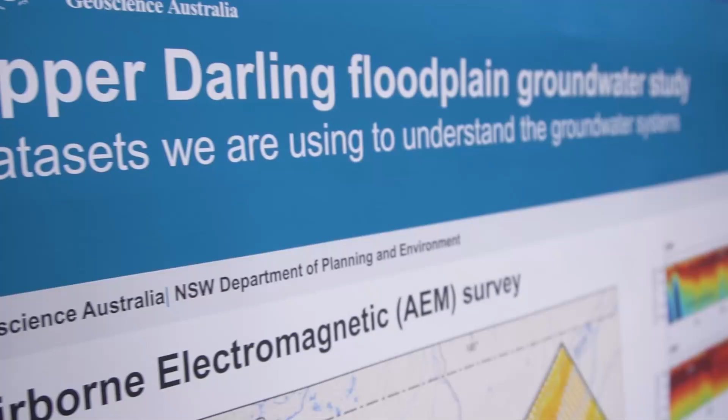We'll work closely with our stakeholders to help them realise the benefits of pre-competitive geoscience data and information and continue to build strong, lasting relationships with First Nations peoples to create further collaborative opportunities.

By partnering with Commonwealth, state and territory governments, our research partners and communities, this landmark initiative will ensure a sustainable, thriving and resilient Australia for future generations.

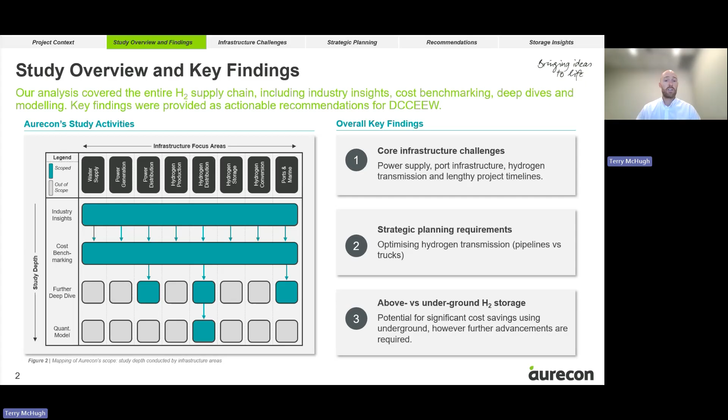The 3 key findings from the work are shown on the right. The first is around some of the major challenges facing industry at the moment, specifically relating to cost-effective power supply, port infrastructure, hydrogen transmission, and lengthy project timelines. We also suggest that strategic planning is required to ensure that the most cost-effective method of hydrogen transmission can be achieved. And then when comparing underground and above ground storage, there are significant cost savings that may be able to be realised through the use of underground hydrogen storage. However, there are some hurdles to overcome.

All right, so getting into some of the infrastructure challenges. The most prominent one and up first is power supply. Securing sufficient cost-competitive renewable energy remains a primary barrier to wide-scale hydrogen adoption. Renewable hydrogen is an extremely energy-intensive process, with power making up about 60% of the total cost of production. Efforts to reduce the cost of supplied power are the most effective option for increasing the viability of projects in Australia.

On the second point, Australian ports will require targeted upgrades and new infrastructure to support hydrogen exports, including storage, processing, and loading facilities. While some ports already handle commodities like ammonia, additional capability will be needed at scale. Some of the challenges include constrained land availability, especially considering the footprint required for portside production. Furthermore, owing to the hazardous nature of hydrogen and derivatives, there is a need for very large separation distances between those sites and neighbours, limiting the number of suitable locations. Separately, ports will need upgrades to accommodate the import of large renewable energy components, such as wind turbines.

On hydrogen transport, whilst pipelines typically offer the lowest cost transmission method for large-scale hydrogen transport, there are currently no operational large-scale hydrogen pipelines in Australia, and the regulatory landscape is still evolving. This study also investigated repurposing of existing natural gas pipelines, and whilst this can potentially reduce approvals timelines and costs, there are technical challenges to overcome, such as material compatibility issues and reduced operating pressures.

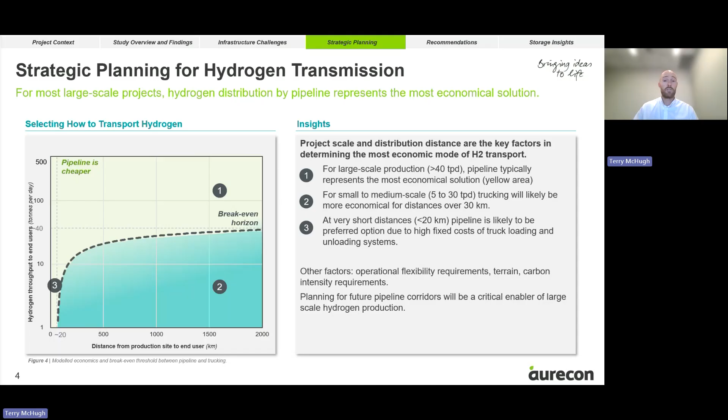Okay, so now onto some of the recommended actions. First is on government-led investment in common user infrastructure, such as low-cost renewables, transmission development, port readiness, and water supply infrastructure, which could improve commercial viability of projects and improve investor confidence. We've also highlighted the need for a coordinated approach between federal, state, and territory governments as critical for developing a clear, robust pathway to hydrogen scale-up.

On the second point, whilst policy was not the focus of this study, this work has highlighted that many hydrogen supply chain technologies, such as hydrogen pipelines, tube trailers for transport, and hydrogen storage solutions, which have been successfully deployed globally elsewhere, are yet to be commercially deployed in Australia. The proactive development of policy, safety guidelines, and permitting standards is essential to avoid project delays and provide confidence that infrastructure will be supported by fit-for-purpose regulation.

And thirdly, the preservation of key transmission and pipeline corridors into prospective hydrogen hub and strategic port locations, for example, Gladstone in Queensland, the Hunter region in New South Wales, Port Bonython in South Australia, Kwinana in WA, or Bell Bay in Tasmania, will protect long-term infrastructure opportunities and reduce future development costs.

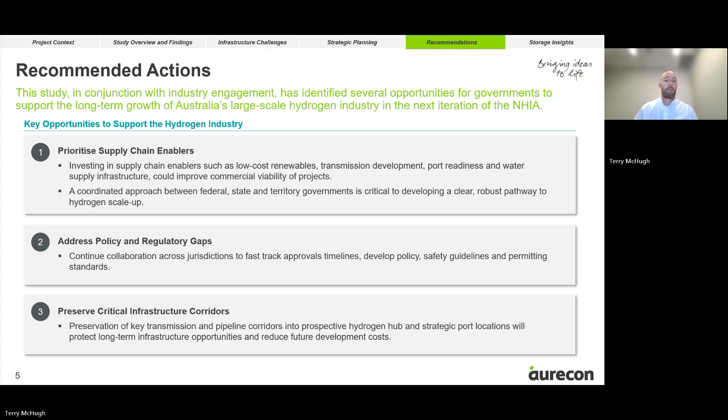Other options for above-ground storage include spherical tanks for storing very high pressure or liquid hydrogen, smaller composite cylinders, or metal hydride storage. Bullets are typically operated at pressures of around 60 to 100 bar, and each vessel is capable of storing about 1.5 to 2 tonnes. In terms of size, these things are massive, about 24 metres tall and 3 metres in diameter, although they can be scaled up and down.

The size and weight of these presents logistical challenges for transporting these vessels to site, and may necessitate on-site fabrication in some instances. In terms of cost, our experience shows that these typically cost around $3.5 million per tonne of stored hydrogen for large-scale projects.

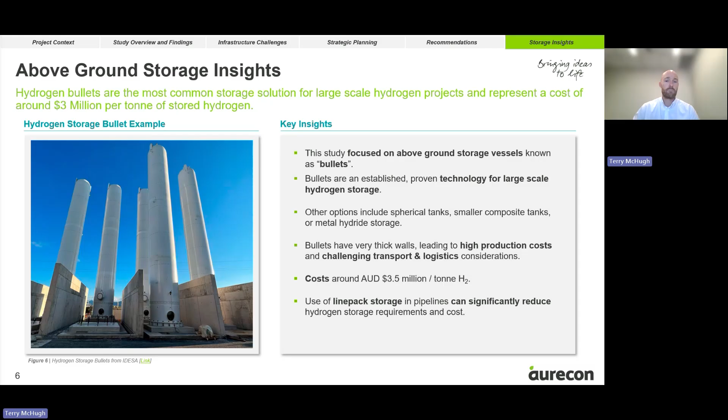Whilst there are only a handful of operating examples globally, studies suggest that the cost of underground hydrogen storage may be as low as an entire order of magnitude cheaper. That is 1/10 the cost compared to above-ground storage solutions. Hence, there is a lot of discussion and focus on this as an opportunity to help bring down the cost of hydrogen.

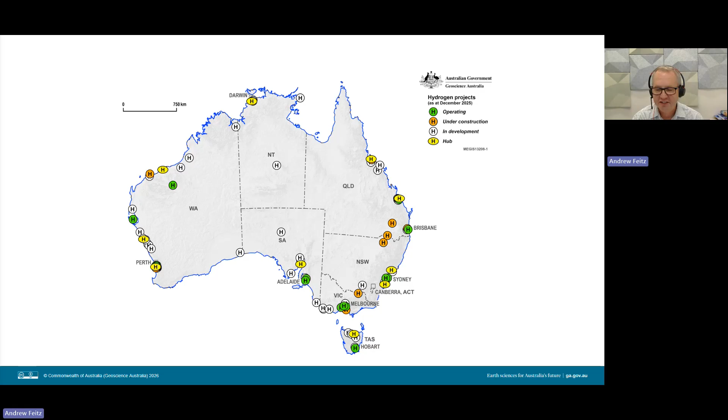All of these projects, if they are successful, will need hydrogen storage of one kind or another. For some projects, that might be tens of kilograms or maybe a couple of tons, and that'll be in above ground high pressure tanks or short pipelines. For other projects, they may require thousands of tons of hydrogen storage to ensure a steady supply of hydrogen to a low emission industrial hub or for plants making products like green iron or ammonia. Having literally thousands of above ground tanks, as you saw from Terry's slide, is simply not practical for a project or cost effective. And this is where underground hydrogen storage becomes important.

Geoscience Australia has committed to produce a national hydrogen hub storage assessment in 2027. It will assess the most feasible underground storage options for each of the planned hydrogen hubs, including depleted fields, salt caverns, and lined rock caverns. Depleted fields occur when natural gas has been extracted from rocks underground. Sometimes the gas is re-injected into these fields to create a seasonal gas storage buffer, like we see at Lochard Energy's Iona plant in Victoria.

Another option is to store hydrogen in salt caverns. The salt required for a cavern is the same rock salt you use in your salt grinder at home, sodium chloride or halite. This type of storage is used for storing commercial quantities of hydrogen around the world today, with many more planned and under construction. These caverns are typically located 500 to 1500 meters underground.

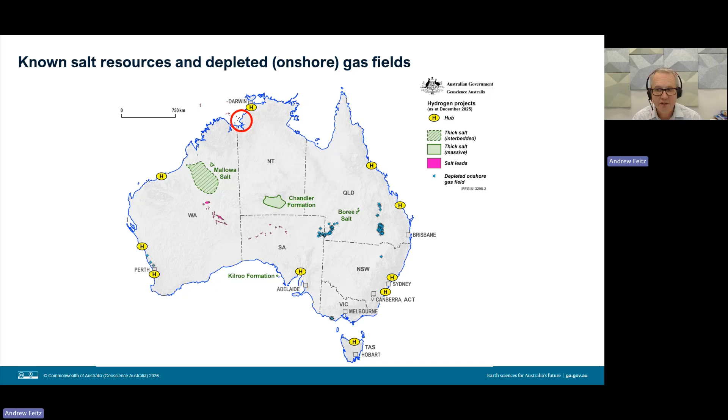An area of interest to us, though, is up near Darwin. You can just make out some tiny small spots up there off the coast, where I've highlighted it in that red circle. These are reported salt diapirs, and there is a chance that these could be located closer to the shore, maybe even onshore. So this is a really exciting area for us to have a look at. That area connects well with existing pipeline easements as well. So this is pretty interesting.

Now, I haven't shown the location of prospective sites for the mined rock caverns on this map. And the reason for that is that they can all be potentially located within approximately 50 kilometers of each of the hubs. So basically where all the current yellow hub markers are at this national scale. And this is the big advantage of mined rock caverns. And we'll explore this a little bit more over the next couple of slides.

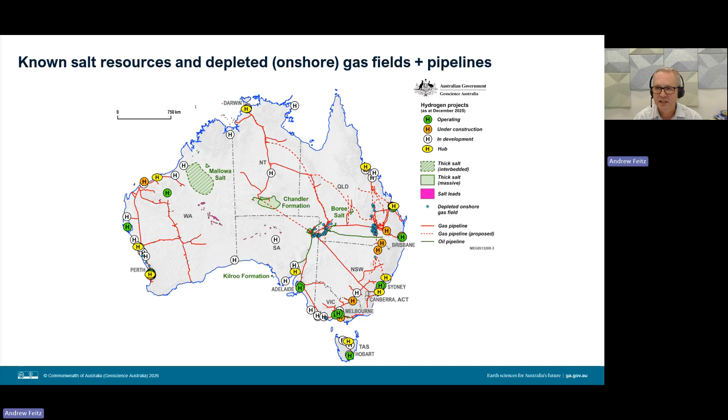Geoscience Australia has recently published work on hard rock caverns and lined rock caverns and the application to Australia. We commissioned 2 studies. There's a study by Geostock, which we'll hear a little bit more about in the next talk, to conduct a study on whether hydrogen could be stored in lined rock caverns and look at some particular sites around Australia. A second study was commissioned to Lane Power and Energy Solution in the US on unlined rock caverns and whether they could be suitable for hydrogen storage. So these 2 reports are available online if you want to have a look at them.

They outline the economics of hydrogen storage. They talk about that building underground caverns has high upfront costs, much like above ground storage tanks in terms of high, but certainly not as high as $3 million per tonne. But the running costs are lower because the caverns are naturally protected underground. And the reports discuss key operational considerations like how much rock, how the rock must behave to safely contain gas, risks such as hydrogen embrittlement or too much pressure, along with ways to manage them. So let's have a look at some of these findings.

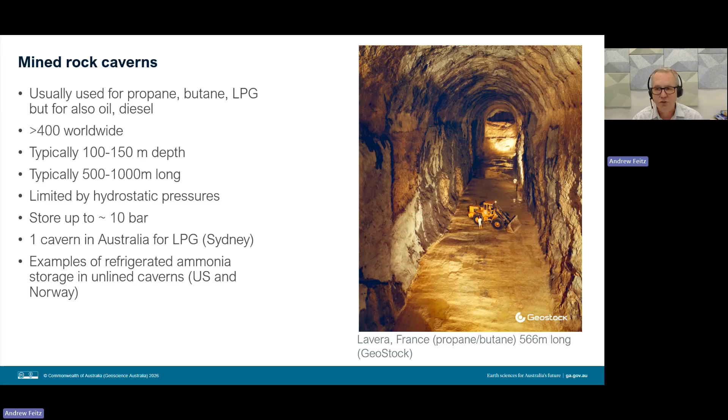Another interesting fact is I wasn't aware of this until fairly recently, but mined rock caverns have also been used for refrigerated ammonia storage. So refrigerated ammonia is at minus 33 degrees. There's examples of these in Norway and in the US. So what essentially happens, you pour the liquid ammonia into a cavern, and it essentially freezes the rock and the water within the rock. So you create like a big ice ball within the rock, and there's a cavity inside which you can use to pull out the refrigerated ammonia. And it turns out that this could be actually a cost-effective way to store ammonia underground in comparison to above ground tanks.

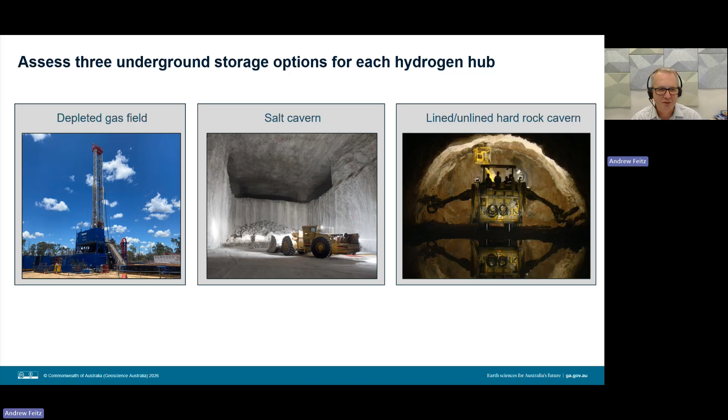Okay, but as we get to the conclusion of this talk, what about the cost? And this is what it's all about. Well, here are some capital costs of different options published in recent reports. 300 million for a salt cavern is definitely on the upper end, I would say. I've seen estimates closer to 100 million. Mined rock caverns have much higher capital costs compared to a salt cavern, however, and we're talking in the order of about $900 million for 1,000 tonnes. We suspect that the capital costs for depleted field storage are cheaper than for salt storage based on what we know about drilling costs, but we don't have published numbers in Australia yet.

However, based on the numbers that you see on the slide, you would think, well, let's go with a depleted gas field. It seems to be the cheapest option, right? Well, it's not that simple, because what we really want to know is how much hydrogen could be delivered each year. So think of the petrol tank in your car. Well, actually, maybe not, unless you want to cry, but filling it up once a year is not going to get you very far. It's the number of refills each year which is important.

And when we include the number of refills into the equation, you can see that a depleted gas field can do 1 or 2 cycles per year, a salt cavern roughly 8 cycles per year, and a lined rock cavern potentially weekly.

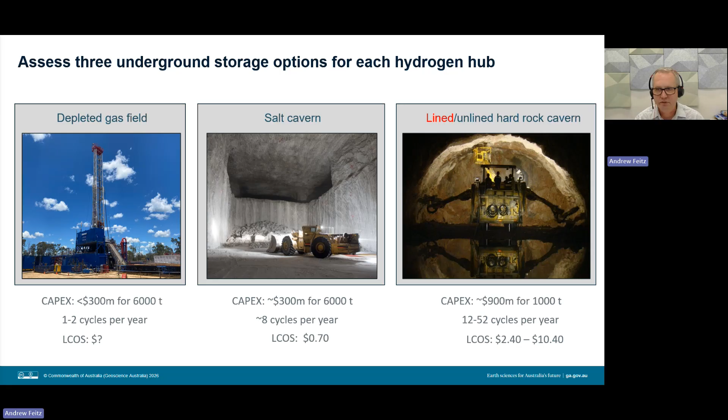The beauty of salt caverns is that with the vertically solution mined ones, they're just separated by a few hundred meters, which means you can have multiple caverns in the one area, and this helps to reduce the costs further. And this is why GA is focusing on finding new salt accumulations. Over the next few years, we plan to fly airborne surveys over different parts of the country, using geophysical techniques like gravity gradiometry to look for signatures of salt deep under the earth.

Once we sort out where the potentially suitable depleted fields are located, remembering that not all depleted fields will be suitable, let's filter down to those that could be and map out the salt as best we can. Then we can start to join the dots and work out what's the best underground storage option for each of the hubs, balancing long pipelines with potentially cheaper storage options further away versus shorter pipelines but more expensive storage. So the solution is going to be different for each of the hubs. So stay tuned for next year when we release our report.

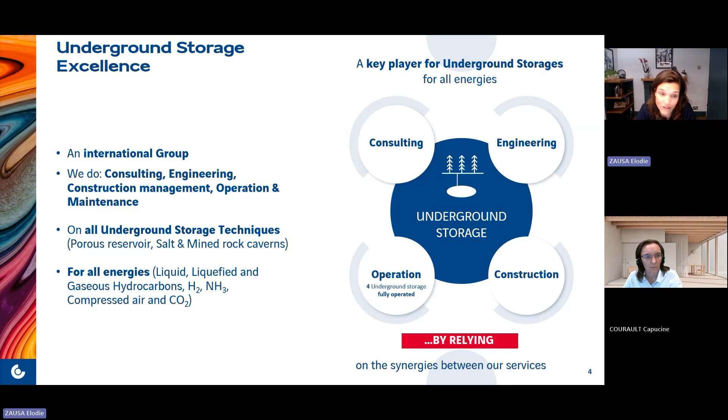We cover actually all the phases to develop underground storage, from the geological screening to the commissioning and the operation and maintenance of the cavern. So it means all the phases: the development of the pre-feasibility, feasibility studies, supervision of the construction, and then commissioning and operation of the caverns. And this for all types of energy. We will focus on hydrogen, but we were created 60 years ago for the development of French strategic stock in France for oil and gas.

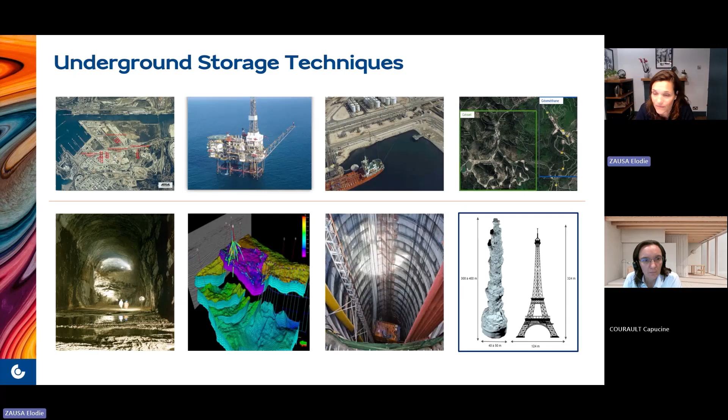So here you have a few pictures of underground storages. Starting with the one on the left, it is a mine cavern in France to store LPG. In the middle is porous media to store natural gas in Spain. Then you have a mine cavern again to store crude oil in Singapore. And on the right-hand side is salt cavern. They store crude oil, refined product, natural gas, and there's one of the biggest projects in France for storing hydrogen, 6,000 tons of hydrogen.

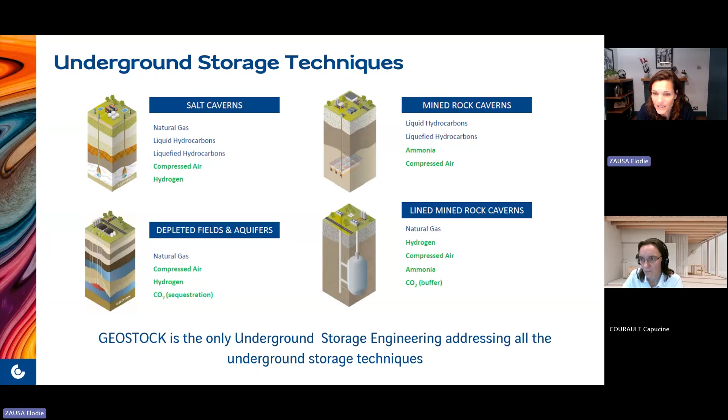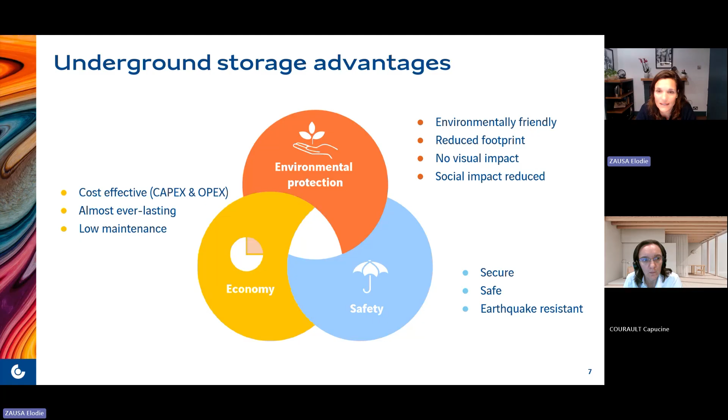And here is the list of all the advantages of underground storage from an economical point of view, safety, we see that quite a lot, unfortunately, right now in the Middle East, and environmental protection as well. Just to give you a quick look, we speak a lot about hydrogen, and we also see that in our activities since 2020. We have done quite a lot of studies worldwide regarding development of hydrogen projects, mainly in Europe, as you can see, and we distinguish the three techniques. In orange, you have the porous media studies, blue for the salt cavern, and pink for the lined mined rock cavern. We have quite well advanced projects in Europe regarding lined mined rock cavern in the UK and Ireland.

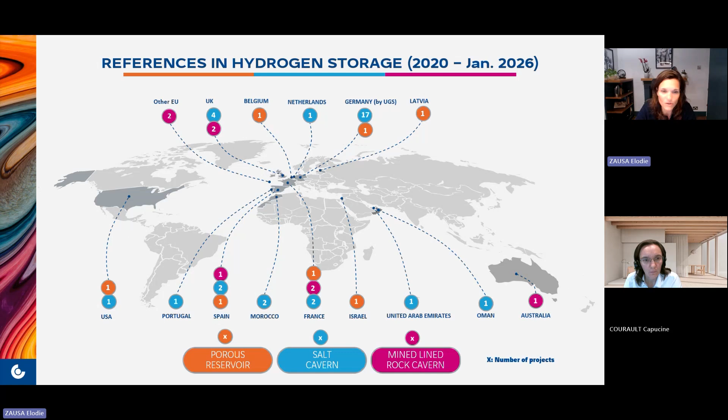So here you have a summary of the advantages, pros and cons, about all those techniques. So clearly the salt cavern is the most proven one. There are already existing caverns in the US and in the UK. Of course, as Andrew said, that technology requires a specific geology that is not available everywhere. We'll see that later. And also, we need quite a lot of water for the process of creating the cavern, the leaching process. And if you are inland, not close to a source of water, this could be a difficulty as well.

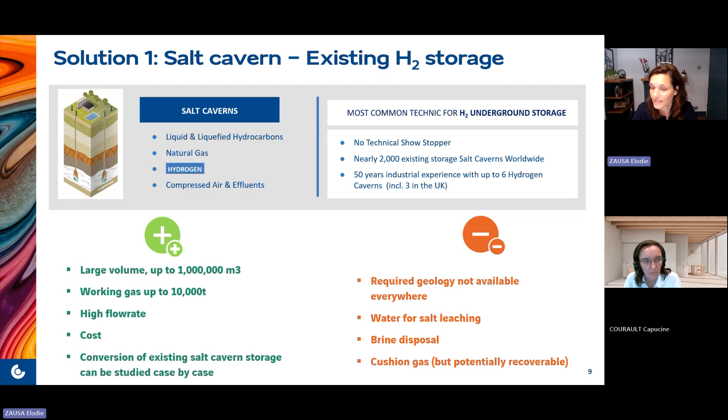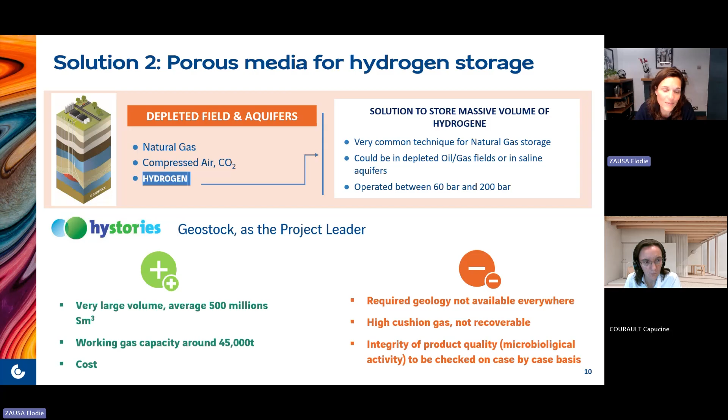If we move on to porous media, there's a very good study that has been done with Geostock as a leader during 2 years, regrouping academics and industries. It's HyStories. You can find all the details online, and that study covers quite a lot of the questions you may have from a technical and economical point of view. This technique, we clearly see it for very large volumes of hydrogen, and it is not as reactive on a day-to-day basis. We recommend going for the salt cavern instead.

And the last one, and then I'll give you the floor, Capucine, is about the lined mined rock cavern. As we said, salt is not everywhere, so definitely you go for salt cavern if you have salt. But if not, we recommend the lined mined rock cavern if we think about storing massive quantities of hydrogen, and we developed that technology just because salt is not everywhere.

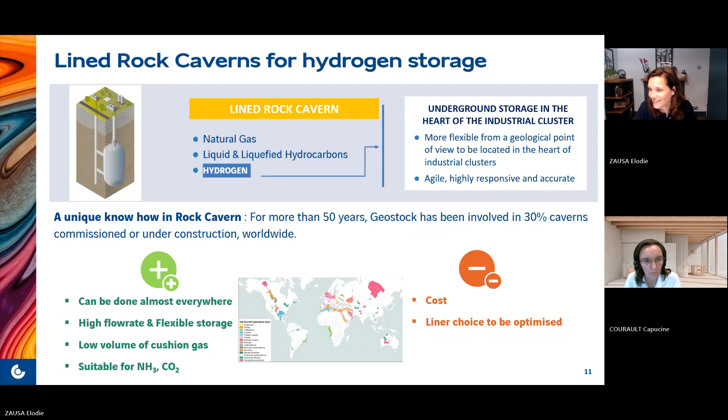And now I'm going to dive into the lined rock caverns. A lot of the slides presented here are part of the studies that Geostock performed for Geoscience Australia, so you can find them in these studies that are publicly available.

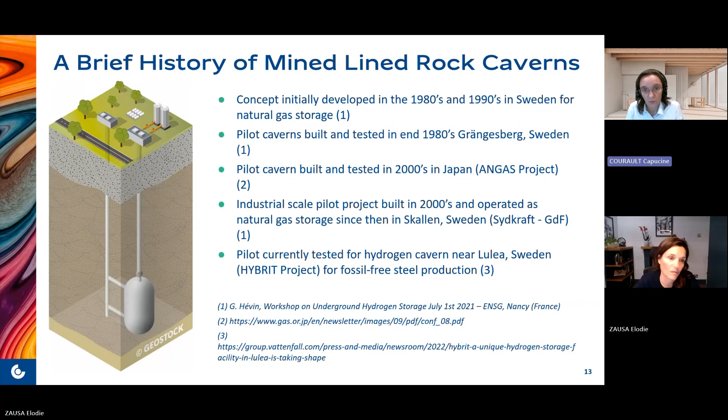A brief history. For lined rock caverns, the concept started to be looked at in the 1980s for natural gas, and then more recently for hydrogen in Sweden. You can see that most of these pilot projects were in Sweden and in Japan, and the reason is that the geology of these two countries, the rock underground, is mostly hard rock. So for these countries, that's the only option. So if you go to the next slide.

So why lined rock caverns? This has already been introduced by Andrew and by Elodie. It's really the concept that with an unlined mined cavern, if you're looking at hydrogen, you are limited to less than 10 bar. And if you use a liner, you can go up to 250 bar. Basically the constraint of being less than 10 bar is that the quantity of hydrogen stored will be very small, so most likely uneconomical.

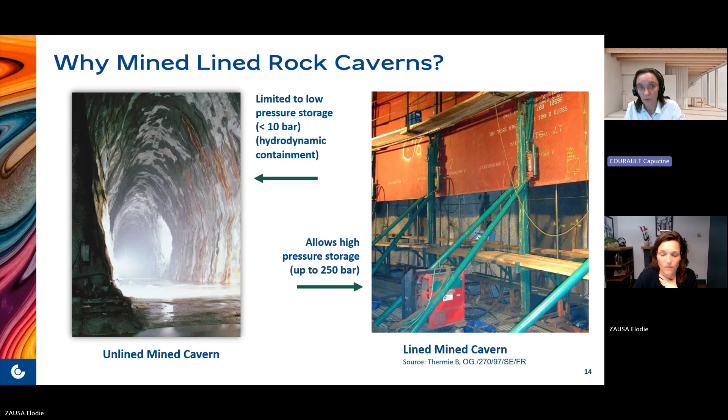However, as Elodie presented in a slide before, you can consider ammonia storage in an unlined mined cavern. And if you go to the next one,

so this is a high-level design workflow for such caverns. You look at the operating needs, injection and withdrawal flow rate. You look at the rock mass parameters, the capacity needs, and then with a lot of rock mechanics analysis, you establish the diameter of your cavern.

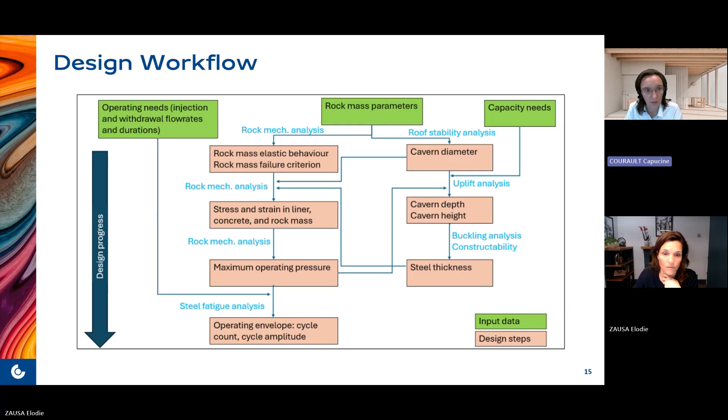These caverns have more of a vertical shape, curved at the top and at the bottom, and they're often called silos because they look like silos. So you estimate diameter, depth, height, the thickness of your steel, a lot of parameters that will allow you to build your cavern. And if you go to the next slide,

this is an example of some parameters that are looked at. For example, if you assume a certain cavern capacity, a minimum pressure, a maximum pressure, you calculate a geometric volume for your cavern, and then you have a concept which is the concept of uplift.

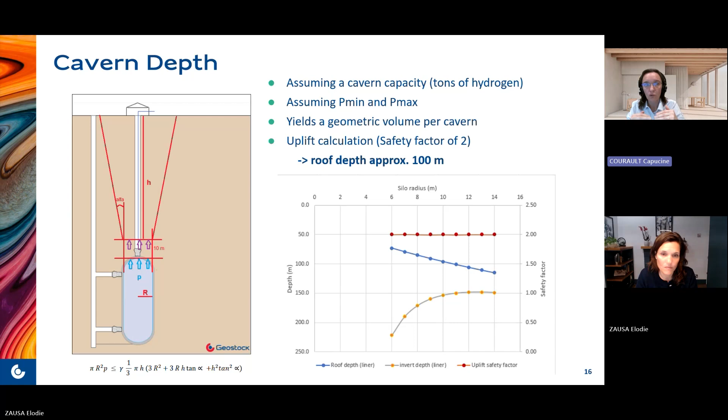When you're at maximum pressure, the pressure from your hydrogen would push the liner, and would break the liner if you don't have enough weight from the rock above. So you look at a certain cone of influence of the rock above the cavern, and you calculate the minimum depth that you need to place your cavern at to still meet a safety factor of 2.

And if you go to the next slide, this is some aspect of construction, just focusing on the slide on the left. We speak about a lined rock cavern, but as you can see, there is a steel liner, but it's not just a steel liner and then the rock next to it. You have, from item 2, the sliding layer, to item 6, the drain pipe.

You have all these elements, and they're really like a buffer, almost like a sponge, maybe like a mat when you do gymnastics, something that would help break the pressures when you're at maximum pressure from the cavern, or when you're at minimum pressure from the cavern, you get the pressure from the rock mass and from the water underground.

So the steel liner, but also layers 2 to 6, have to be designed properly to really accommodate this swing of pressure, so that the steel liner doesn't break during the operation.

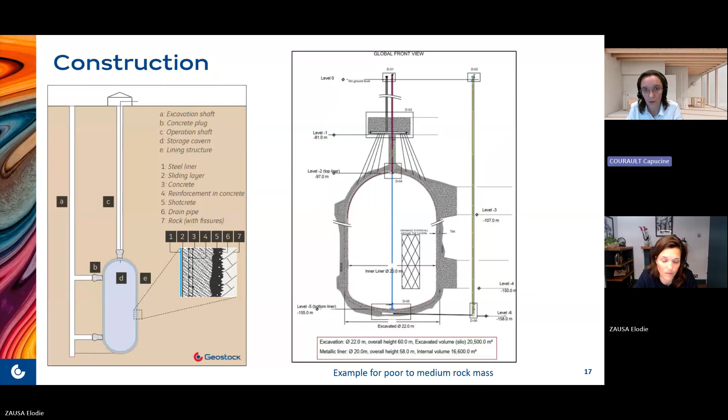And if you go to the next slide, these are some aspects of the typical surface facilities equipment for such hydrogen underground storage. The main equipment is filtration, metering, compression, like a three-stage compression, and then piping, vents, pig traps, and things that, if some of you are familiar with underground storage for hydrocarbons or natural gas, are quite similar to what already exists for underground storage.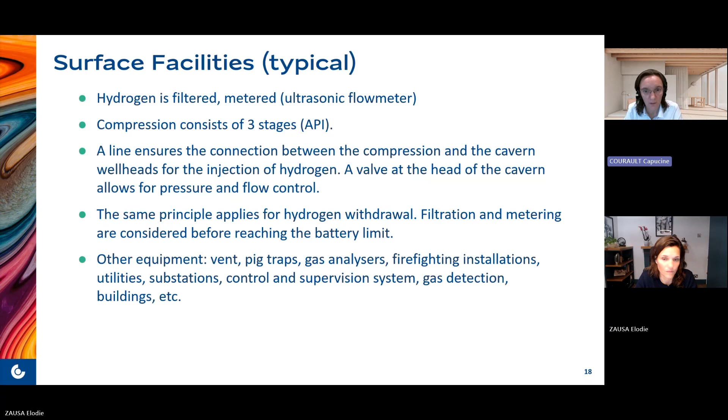And if you go to the next slide, so this slide and the next slide present some aspects about cost. We break the cost into subsurface cost and surface cost. Subsurface cost is between 330 Australian dollars per kilo to 2,000 Australian dollars per kilo. And really the drivers for subsurface cost are the capacity and the geology. So large capacity and favorable geology will drive lower subsurface cost per kilo.

And then the surface cost, oh, sorry, if you go back, surface cost, you're looking at 115 million to 1,150 million Australian dollars. So here, lower delivery rate, lower surface cost, and higher delivery rate, higher surface cost.

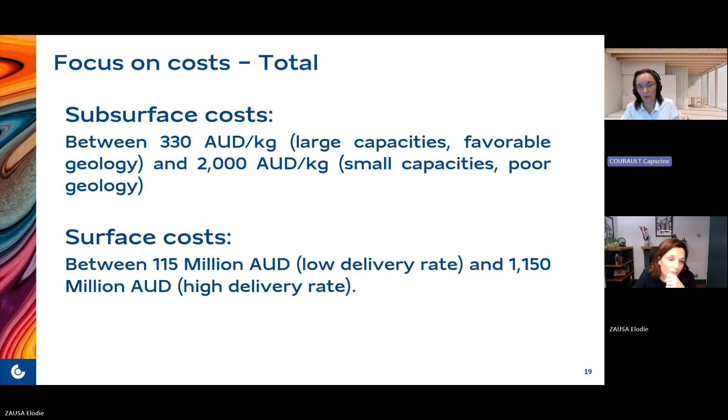And then if you go to the next slide, this shows the total cost, and it's taking the example of a cavern of 1,000 tons, which is a reasonable size for such a storage project. The three on the left show the example with a good rock, a very good rock, and an excellent rock, and you are looking at a variation of approximately 800 to 1,000 Australian dollars per kilo.

What you can notice with the one in red on the right is that if you're looking at the same excellent rock, but at a higher tonnage, you are decreasing your cost to 600 Australian dollars per kilo, just with a higher quantity. Another aspect is OPEX per year, which is estimated to be 2 to 4% of the CAPEX. And another thing which is not presented here but is in the study is if you plan for many cycles of injection and withdrawal per year, this will lower your unit cost per kilo over the history of your storage.